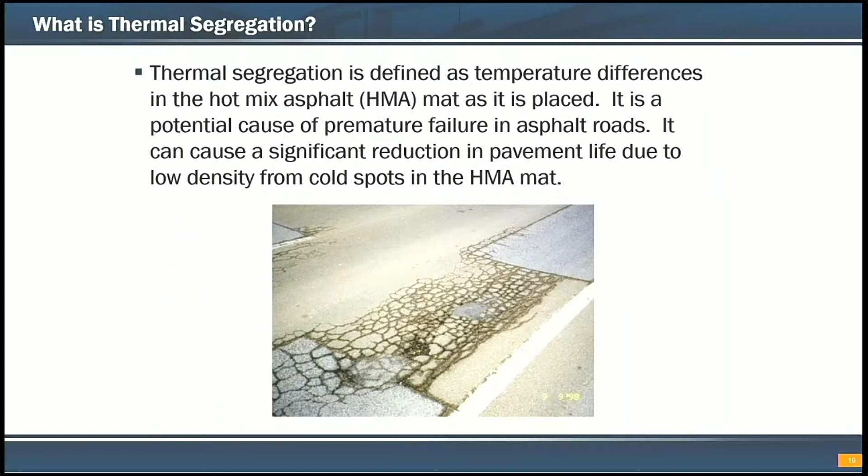So first question is what is thermal segregation? If you look at the screen, you will see the definition that we have regarding thermal segregation. Now, that's a long definition. It's actually much more simple than that. Really, thermal segregation is basically hot and cold spots in the mat. The concern is that when you have cold spots in the mat, you don't get compaction. So this leads to high air voids in those areas that are cold.

So what are some of the symptoms of thermal segregation? Sometimes you'll see what's on the screen in the picture on the right-hand side: what we call localized spots of coarse texture. And these spots can hold water after a rain event. What's our concern with these cold spots and therefore thermal segregation? Our concern is premature failure due to fatigue cracking, raveling, and moisture. In other words, we're concerned about the quality of our mat because we know that thermal segregation will impact that quality and may result in us not being able to achieve the design life that we need.

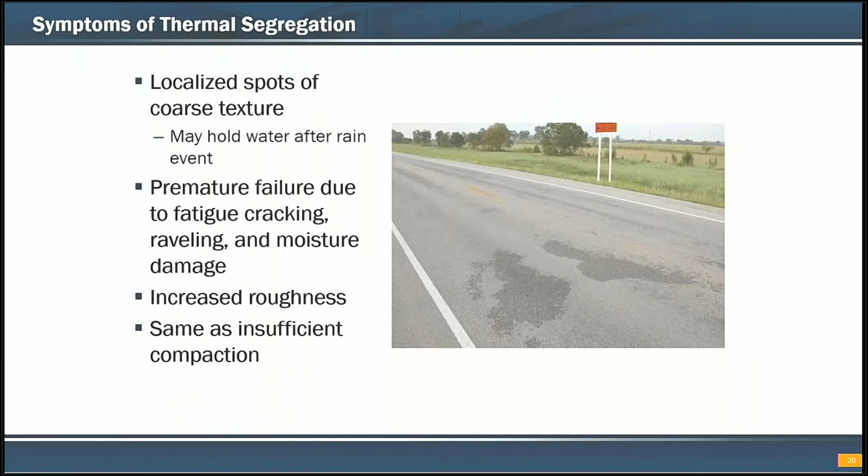In addition to that, another concern would be increased roughness. As you can imagine, if you have an area on the mat that compacts well because it's at a hot temperature, and then an area that's cold and doesn't compact, it's going to cause a bump. So another concern regarding thermal segregation is increased roughness on our roads. And we pride ourselves in long-lasting, durable, smooth pavements. Really, the concept of thermal segregation is basically the same as insufficient compaction.

So some general rules of thumb that I think are very important to consider when we talk about thermal segregation. On the screen, you'll see for dense graded hot mix, a 1% increase in air voids above a baseline of 7% results in a minimum of 10% decrease in the pavement life. So what does that mean? If I consider a baseline of 7% air voids, when I go to 8% air voids, I can expect at least a 10% decrease in my pavement life because of the increase in air voids. Furthermore, a 25-degree Fahrenheit temperature differential results in approximately 1 to 2% more air voids in those areas that are cold.

So as you can imagine, if we talk about a temperature differential of, say, 50 degrees Fahrenheit, we can expect upwards of 4% more air voids in those cold spots. And that is the concern that we have in terms of affecting the durability of our pavements.

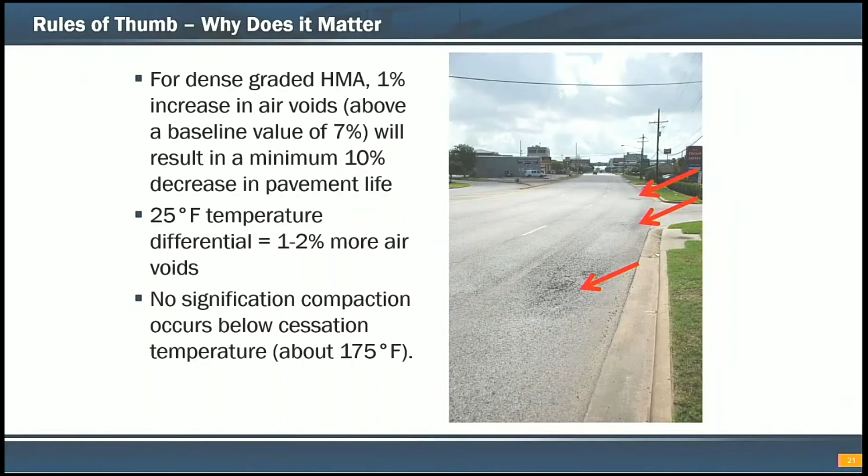And so the next question is, what do these cold spots look like? Well, we can't see heat. We can see physical segregation, but we can't see thermal segregation. What you see on the screen is an actual thermal image taken by a thermal camera that shows what thermal segregation looks like as a result of end of load. When we have end of load segregation, you end up having cold mix that enters the paver and then essentially gets smeared on the pavement surface.

And so it's these spots that we're concerned about, because if you look closely, I went through FLIR analysis and looked at the temperature differential on this image, and you can see that the temperature differential in the blue area versus the red area is somewhere right around 80 degrees Fahrenheit. So remember we said for every 25 degrees, 1 to 2% more air voids; we can expect upwards of right around 6% more air voids in those blue spots. So that's our concern.

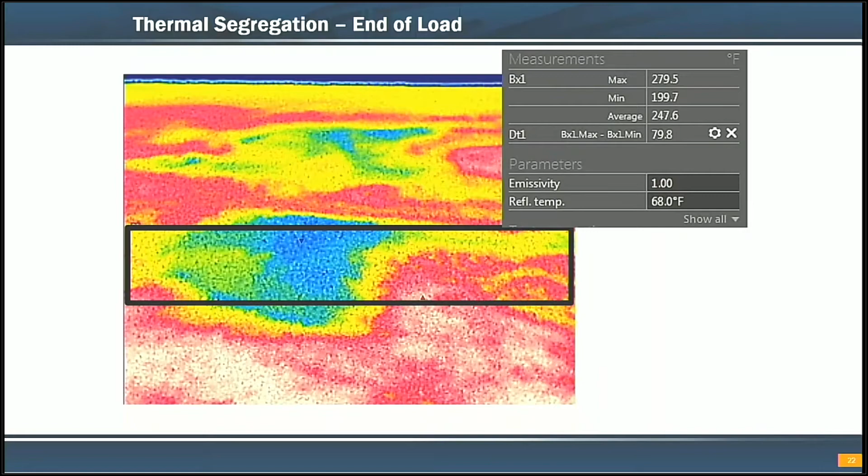Furthermore, the second concern that we have, and you'll see on the next slide, is basically paver stops. Paver stops can be just as bad as end of load segregation. Why? Because what you're seeing on the screen is an actual shot taken after the paver began to advance because it received more mix. But during that time, as that paver was sitting there, what you're seeing is that, number one, the screed heaters were left on.

So in that white/red area, you're seeing that basically the temperature in those areas is upwards of 332 degrees Fahrenheit. So you're essentially burning the mix. And then just behind the screed, because the paver's in the way, you can't get the mix compacted. You can see that the temperature is somewhere right around 190. So we set 175 as our cessation temperature. We're approaching that to where basically we're not going to be able to get compaction in that blue area simply because the paver is in the way.

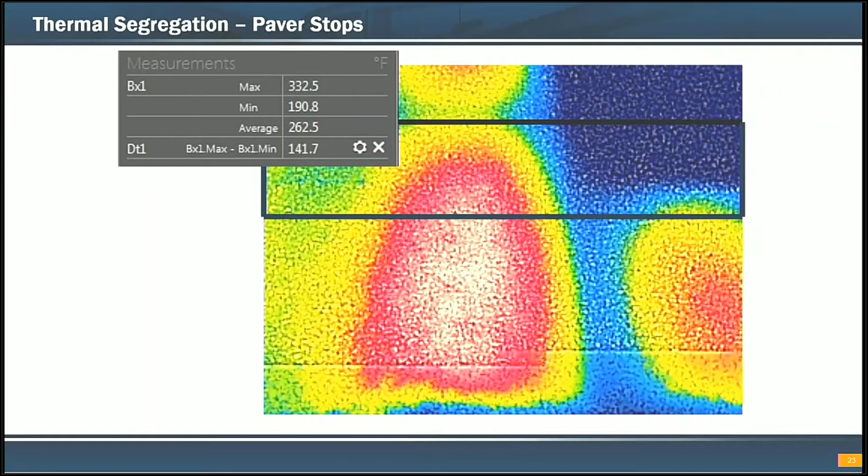There are several things that we can do to minimize thermal segregation. I wasn't going to spend a lot of time on this slide, but these are some very good best practices to minimize that. You have what we call the material transfer vehicle with remixing capability. These have shown to provide really good remix. Because you're able to remix the mix, any of those cold areas get remixed, and then you're not subject to having that cold mix being smeared on the surface of the pavement. So the MTVs with remixing capability do a good job of that.

Just jumping in there, I think that's a real key thing: you're going to get some surface cooling on the mix in transit. The longer the haul, the more those MTVs, or even whether they're using a bottom dump or just an end dump or a flow boy, are going to help us even the temperature out by the time that mix gets back into the hopper, through the paver, underneath the screed. And again, most of the time you'll never see that with your eye, but it'll be there, and this will help sort things and kind of even things out.

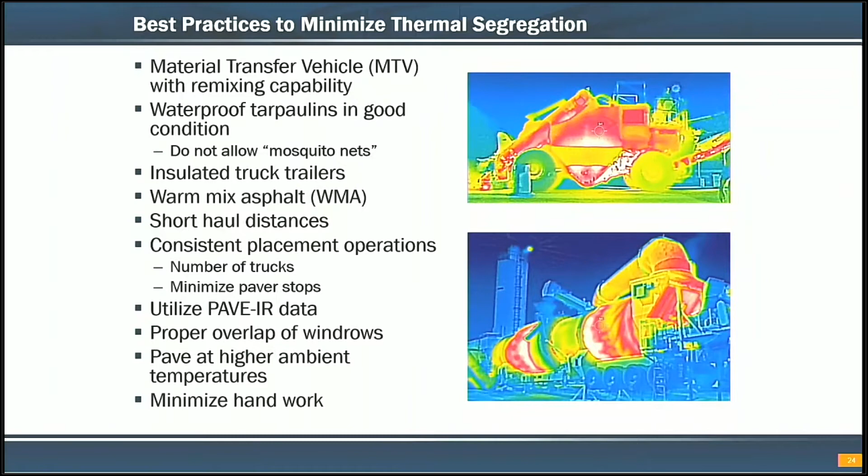So let's talk about the specification for a minute. What is the specification? What does the TxDOT specification say? It says use a handheld thermal camera or thermal imaging system to obtain a continuous thermal profile in accordance with Tex-244-F. That's what our specification says.

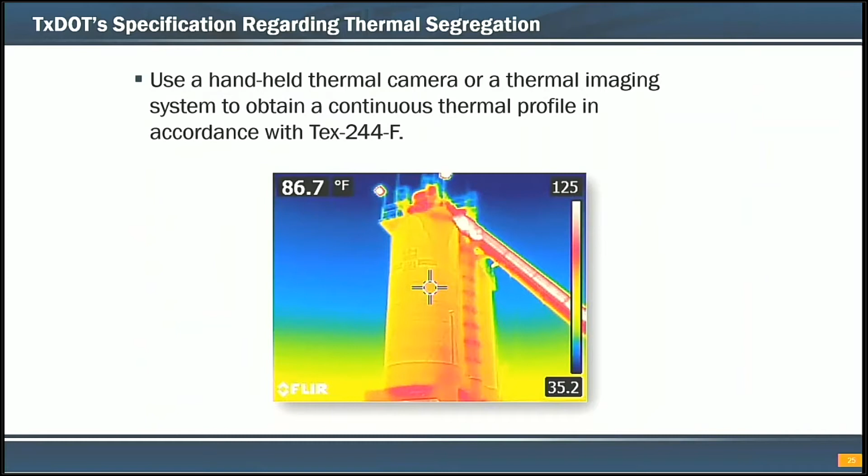So I'm going to switch gears. One more statement, just to jump in there. I guess this is a statement more than a question. It said also lower temps reduce AC absorption, so more effective asphalt is available as well. Thanks, Harry. Very, very true.

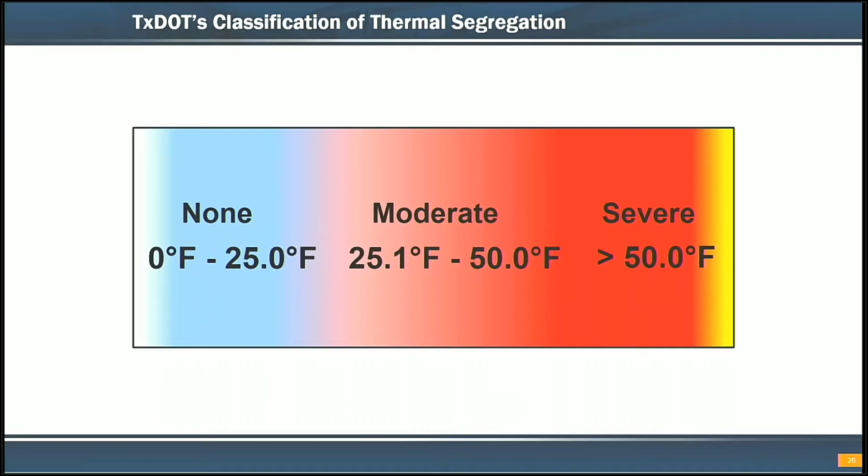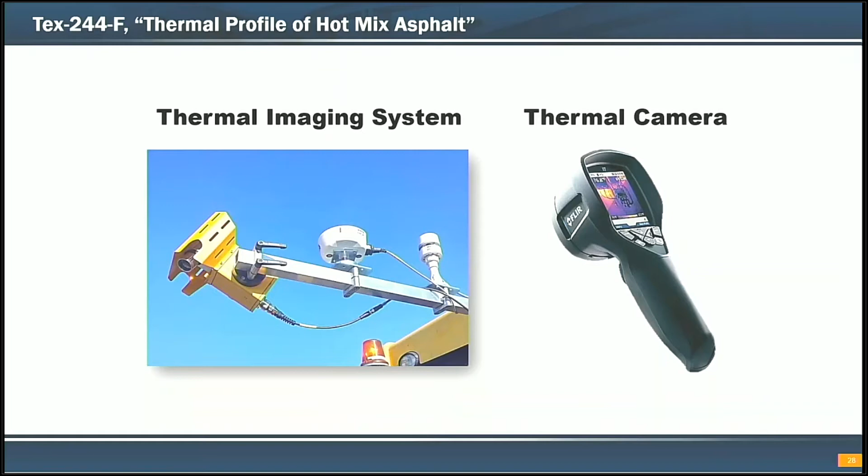So now let's talk about the changes that we proposed to Tex-244. So first off, when you look in Tex-244, you have, like we said, what the specification requires. There's two ways to obtain that thermal profile. You have a thermal imaging system and you have the thermal camera. So I'm going to first talk about the thermal camera and the changes that we proposed. If you don't mind going to the next slide. Oh, I'm sorry, I was reading another question. Let me jump in there real quick.

How do we determine the effect of thermal segregation on mixes where we don't measure in-place density, i.e. TOMs and PFCs? So in those particular mixes, the concern on TOM mixes, in the new specifications we have included more testing with our drain down. So that's the way we look at it: if we don't get compaction on our TOM mix, it's going to be more likely for the mix to drain water, which is exactly what you don't want it to do, because the whole reason we're putting a TOM mix on top is to seal that surface. We're trying to seal off any water from getting into the pavement layers underneath.

PFC is something that we are concerned about in terms of thermal segregation, because our concern with PFCs would be raveling. So if you're not able to get that PFC, the aggregate, the mix itself seated, it's more likely for it to ravel at a future date. Yep.

So going back to the changes to the thermal camera test procedure. One thing I wanted to mention is that when you look in the test procedure itself, you will see that there's a lot of red on the thermal camera section. But what we have to keep in mind is that when you start to read it, you'll see it is very similar to the guidance document that we published about 4 years ago.

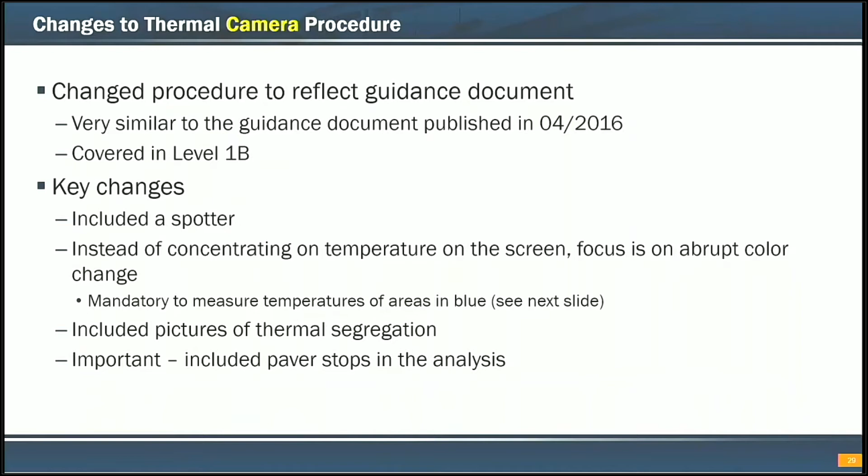Okay. In addition to that, we included pictures of thermal segregation. So we have a whole bunch of pictures in that document to show what thermal segregation is going to look like on the camera screen. And then this is very important: we also propose to include paver stops in the analysis. So you can now advance, Jim, unless there's any question, to the next slide. After that one? There we go.

So, yep, ready for this one, because that previous slide was basically showing you an example of an abrupt color change. So in terms of the thermal imaging system, we did get feedback from suppliers suggesting that the profile as proposed could cause some major problems with the analysis. We realize that our goal is to have a test procedure where all thermal imaging systems can meet it, okay?

So what we're gonna do is, after we get feedback from industry regarding the changes that are currently being proposed, we are going to propose that the current method that's used for the thermal imaging system be used, except we're going to propose not having that 2-foot offset that is currently in our thermal imaging system profile. And that will allow some of the other manufacturers to jump in there. That's correct. That will allow some of the other manufacturers' devices to be used to meet our test procedure.

Gotcha. Some additional key changes that I'd like to stress is that the system must remain on during the paving operations. The idea behind using the thermal imaging system is that it doesn't do us any good if it's not on, right? So what we proposed in the test procedure was, from the time you start to the time you finish, we want that system on, so it's collecting data so we can make use of that data. And then we also proposed including paver stops in the analysis. Okay, good deal.

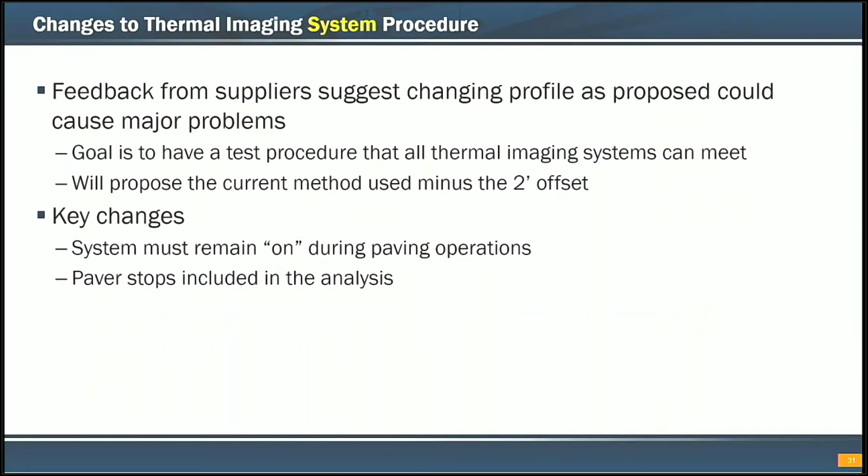Ron, when do you think that the test procedure to include the other suppliers will be accomplished? I mean, is it after we go through 244? Are you going to resubmit 244 to industry, or what's the direction we need to do with 244 now? So that's correct, Chuck. Whenever we get the comments back, we're going to address the comments. We're going to send a second version with those changes that we just discussed, for additional comments.

And in the meantime, the other thing that we're going to work on is our template that we use to record the data. We want to make sure that those other systems have the ability to record their data within Site Manager. So we're going to be working on that all at the same time. All right, so to answer your question, Chuck, I'd say within a couple months at the latest. Yeah, so going into the third or fourth quarter, we should be able to have this thing hammered out, right? That's correct. Perfect. All right, thank you.

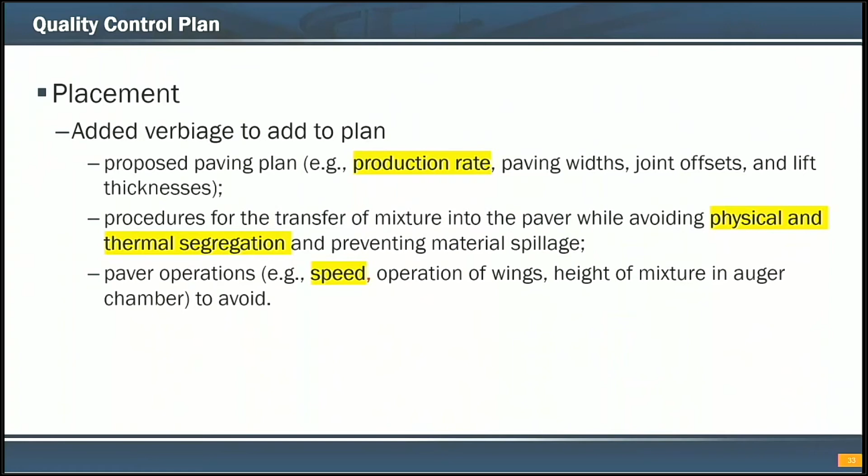In addition to that, on the next slide, I've broken it down into thermal camera versus thermal imaging system. So what's the impact that Tex-244 is going to have in terms of the thermal camera? And so what we put in the new specifications, meaning 3076 and 3077, that's already published.

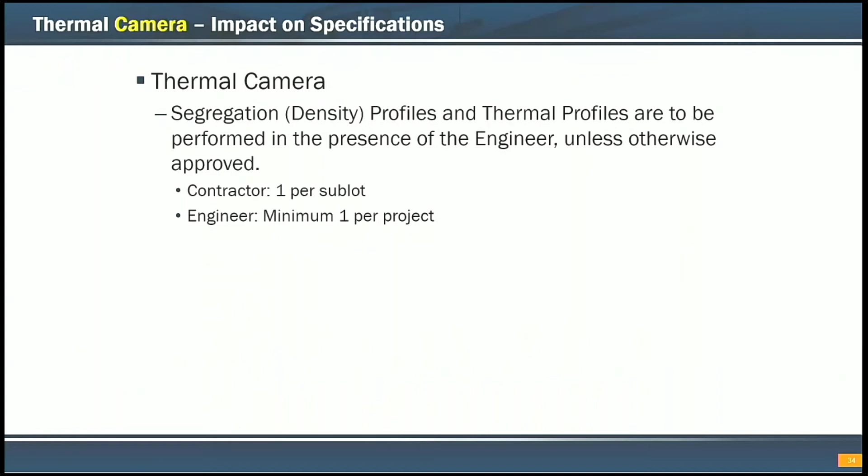And then in the new specifications, we stated that the segregation density profiles and thermal profiles are to be performed in the presence of the engineer unless otherwise approved. Okay, so that is actually in the spec in 3076 and 3077. So one way to look at it is that the engineer could be your spotter, right? Could be your spotter.

Yeah, I was going to ask about that, because that makes the most sense. He's out there, he can keep an eye on things, but also he's there monitoring what's going on, getting two things done at the same time. I think that's a great idea.

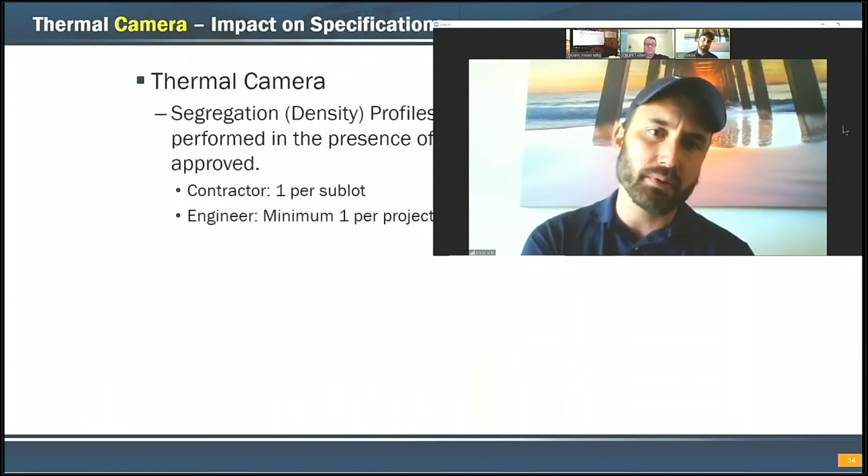That's right. And so in terms of the testing frequency, we did not change that. That has always been what you see on the screen. Contractor, 1 per sublot, engineer, minimum of 1 per project. I just wanted to point that out. We did not change the testing frequency; it's basically the same as the former spec.

And again, the idea behind a paver stop is that there's nothing wrong with the paver stopping. We all know it's going to happen. It's a matter of how long does that paver stop? What temperature does that mix that's uncompacted behind the screed get to before the operations start up again, okay?

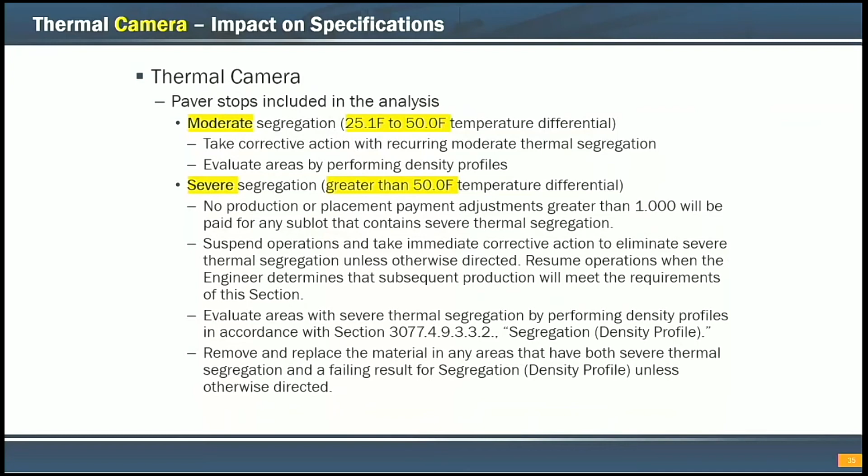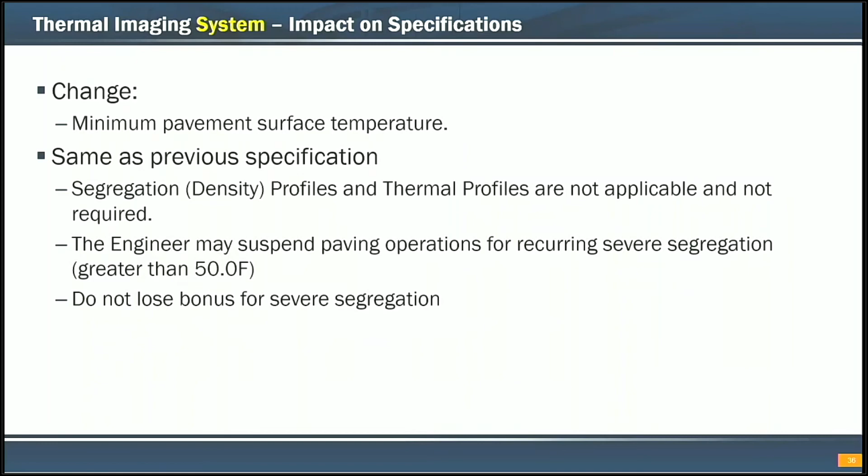That's correct. Okay. Chuck? And Jim, I think that kind of sums it all up. All right. We can open it up to any questions anybody may have. I got a couple of real quick comments.

In the new specifications, especially with these thinner mixes and the SMA, I should say in the dense graded, our segregation density profiles are now going to be temperature related. Instead of the paver stopping for 1 minute, it's going to be temperature related when you have to run a density profile. It goes back to what Ryan's been saying: we're going to concentrate on temperatures.

So we have minimum placement temperatures on all the new specs. We have maximum production temperatures. You have now temperatures on density profiles for dense graded Superpave SMAs. In other words, the uncompacted mat behind the paver, when it does stop, we're going to have to be running density profiles. Plus, you got to run one per sublot. So when you put it all together, the running with the camera is going to be a bear.

I mean, the IR system or your thermal imaging system seems like that's the way to go on your surface mix. And I know, Ryan, you and Materials and Tests Division have had several conversations about utilizing a thermal imaging system on these specialty mixes like PFCs and thin bonded wearing courses, and maybe even making it part of the specification. You want to just jump into that a little bit so that we'll know what's coming down the pike here?

Sure, Chuck. So the idea is that for specialty mixes such as TOMs and such as PFCs, the idea would be to only require the thermal imaging system. And so being that we're opening up Tex-244 to include these other thermal imaging systems, it's something that we would like to start the discussion with industry. What's industry's thoughts regarding that?